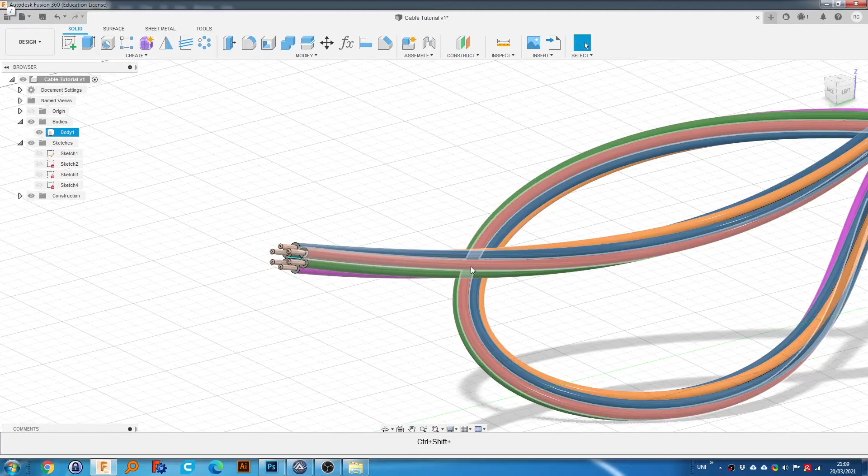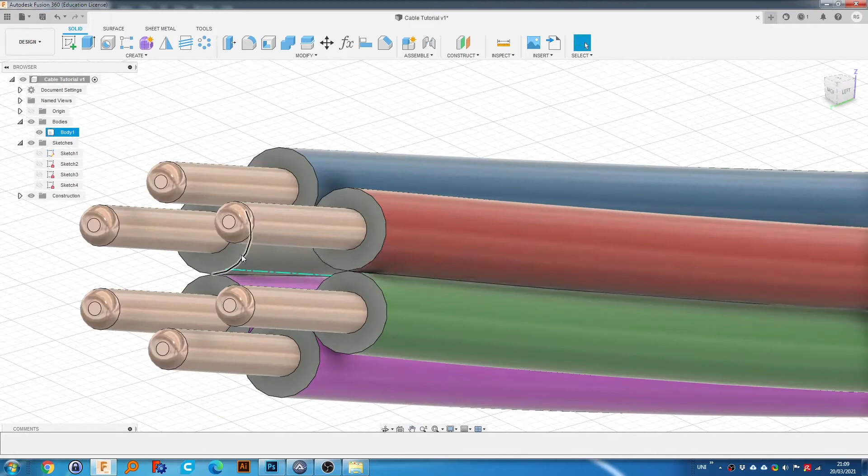This is a Fusion 360 tutorial on creating beautiful bundles of cables. So it's quite a simple concept, but it's very useful to know how to do this. So I will be teaching you how to make this load of mess.

At the bottom, you can see that I have a panel which I currently coded in AutoIt, so it should show the letters, the keys on my keyboard which I'm currently pressing. It's extremely buggy at the moment, so yeah, I have not finished this remotely, and it's kind of a code nightmare. Probably some mistakes in there, no doubt.

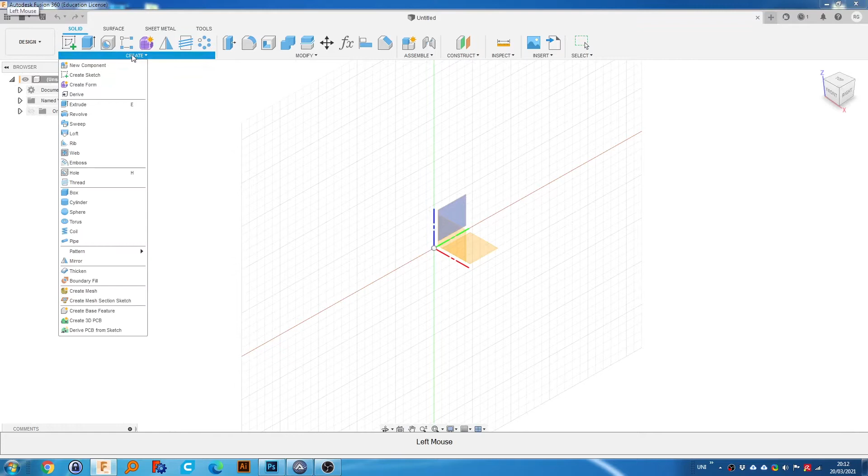Anyway, so hopefully that just gives you some sort of indication of any hotkeys I forget to mention that I use. So for example, I press L a lot of times to start a sketch, even though I am not necessarily using a line. Anyway, so let's get straight into the video.

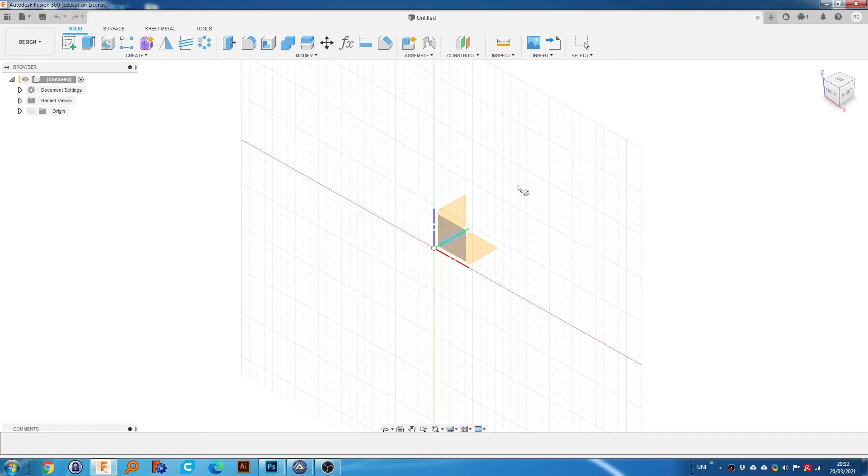So to create a cable, what we need to do is create a path essentially. So we're going to do it in the old-fashioned way, so in 2 dimensions. So I'm going to select one of these planes, so I'm going to select this one. Next, I'm going to select the spline tool, and I'm just going to draw some random shape, just for video

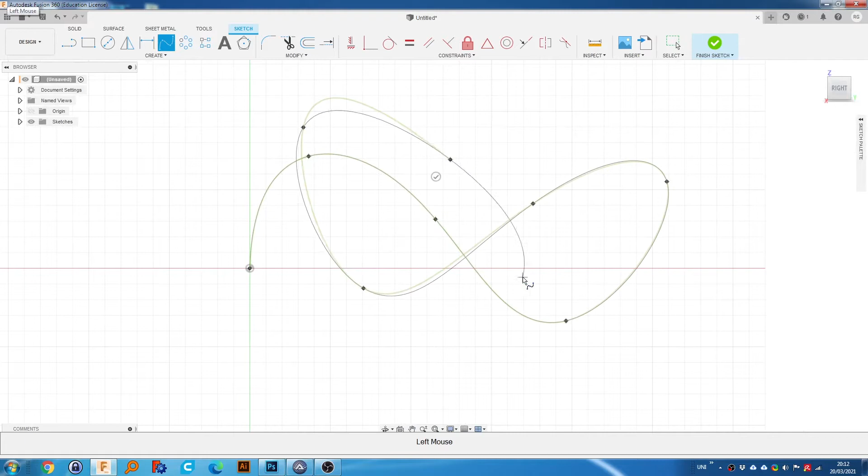sake. If this was for something like a device that you wanted to fit a cable, then you'd make something a little bit more thought out. Okay, so what I'm going to do here is making sure for this example, 3D Sketch is off, which it should be by default.

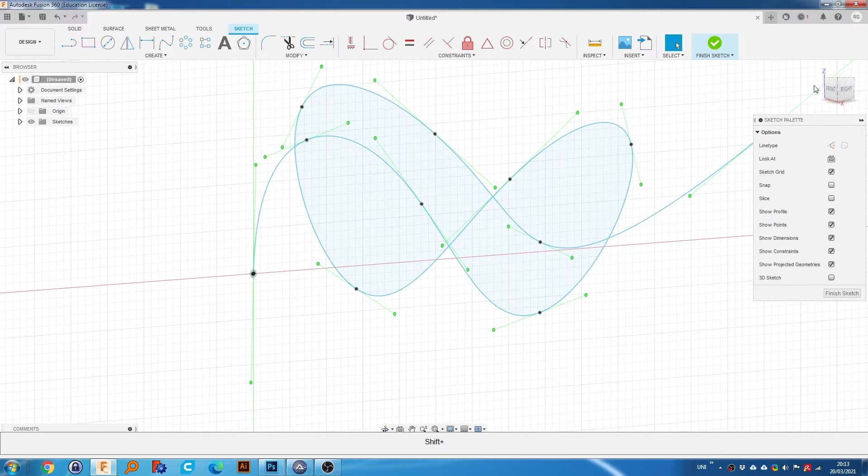What I'm going to do is work orthogonally, which means I'm going to work in discrete kind of angles, so front, right, and I'm not going to work in in-between angles like this, because it just will not be working out for you. You'll find that out if you ever try. Whenever you move a point, it won't be remotely what you thought it was. So if you work orthogonally, this essentially avoids it. So for now, I'm going to select the front face.

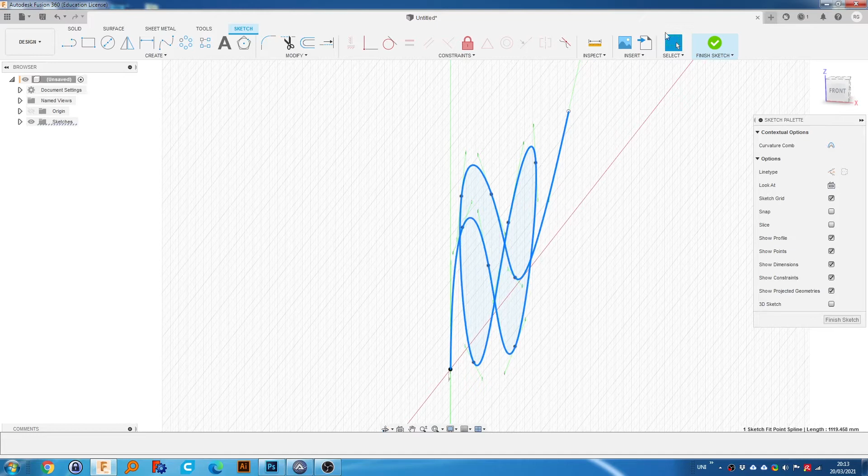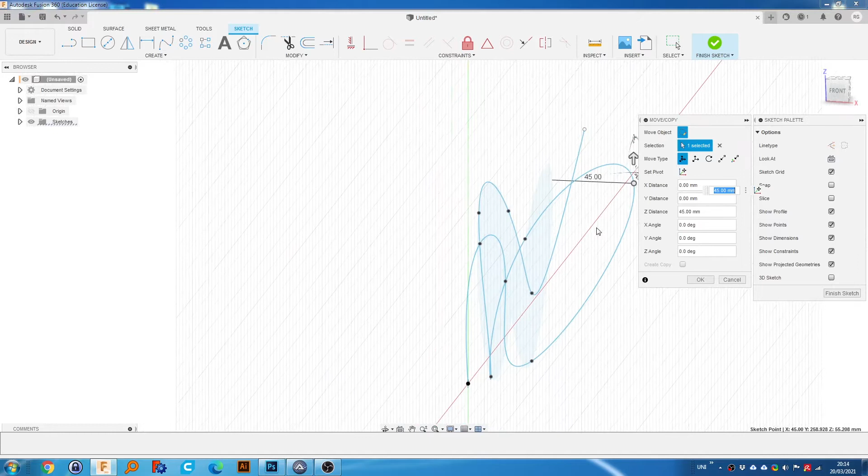Now this can be a little difficult as well, so I'm kind of gonna have to be a bit of a liar and go a bit halfway. So essentially what I'm going to do is select the selection tool, and we're going to hit M for move. First select one of the points, so we're going to say this one here. Select M, select the point, and now we're just going to give this some random translation. So this will bring it out of its 2-dimensional state into 3D.

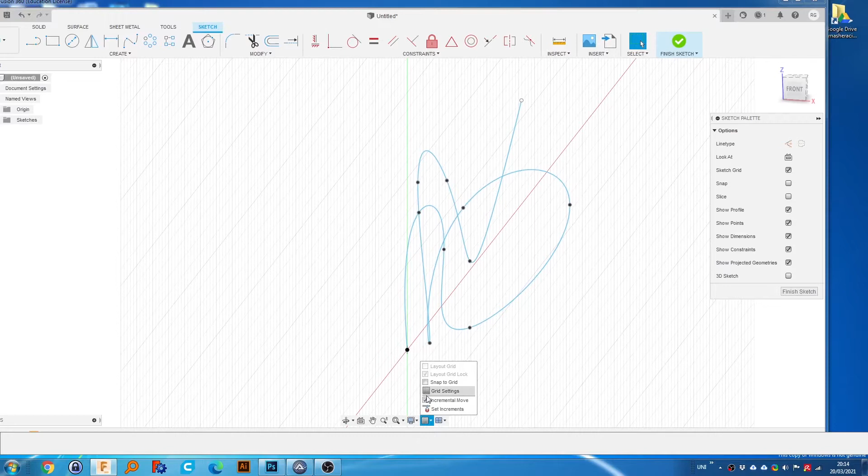We're going to do the same thing here. And I think I have a setting turned off, which is being blocked by that. I need to select it back on. Incremental snap. I think that's the one I wanted. So we want to move another point, select M. Just mess around with it. Go back orthogonally. Now we can sort of do the rest orthogonally.

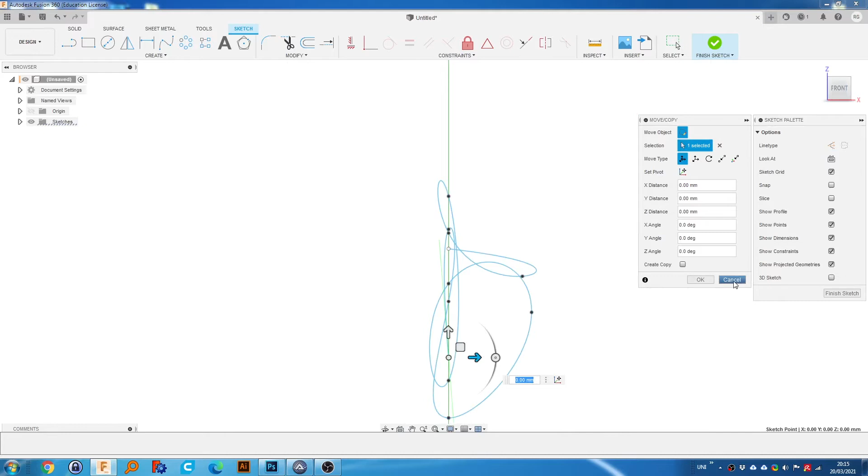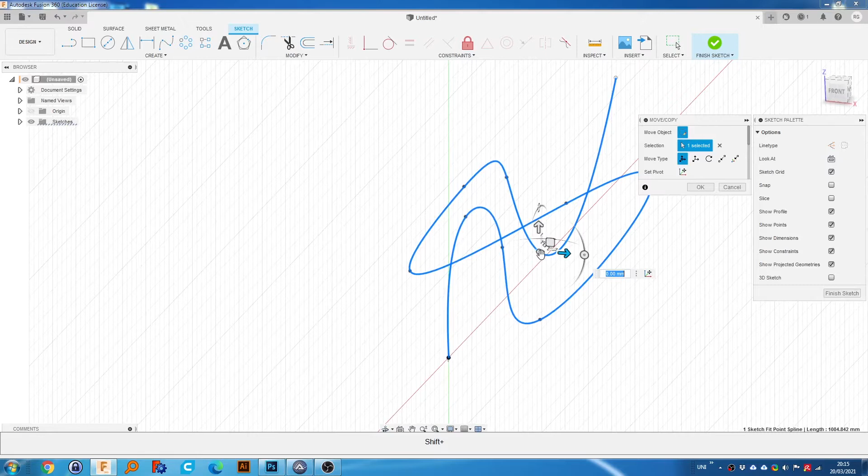So I'm starting one that's got a constraint. Let's try this one here. And move this up. Let's move this here about. This one, there we go. So we can move maybe this one as well,

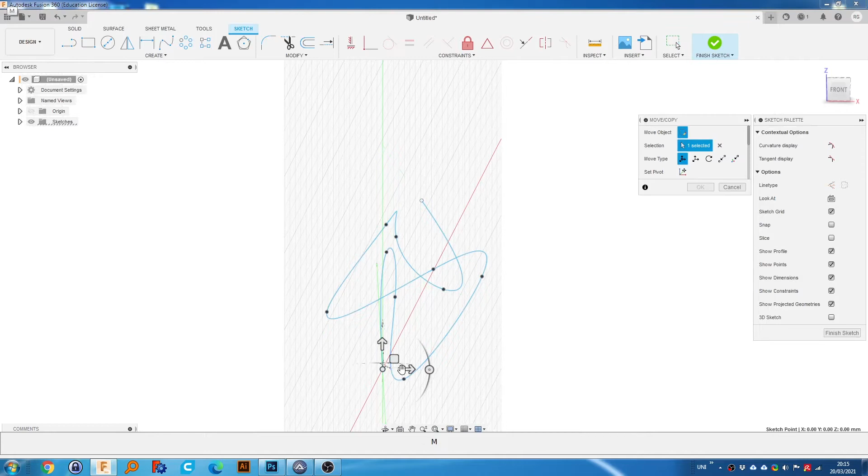which is actually constrained, I believe. Yeah, you can see this one is constrained by the origin using this coincident constraint. So what you can do to avoid that is you can select it and hit delete.

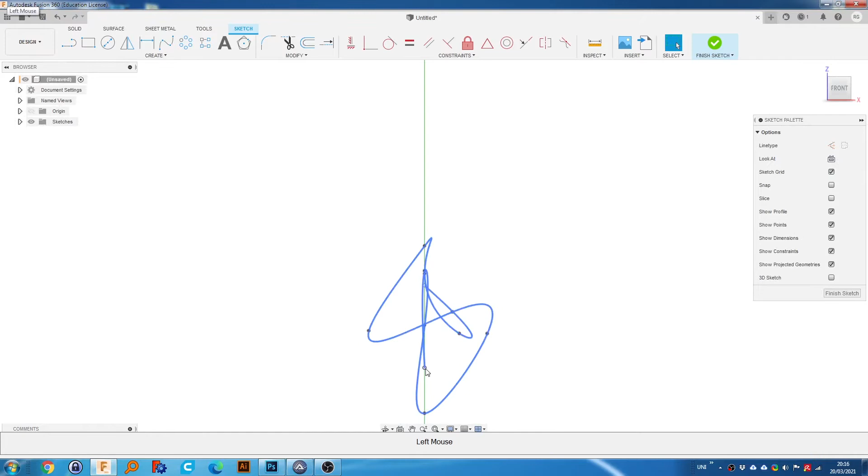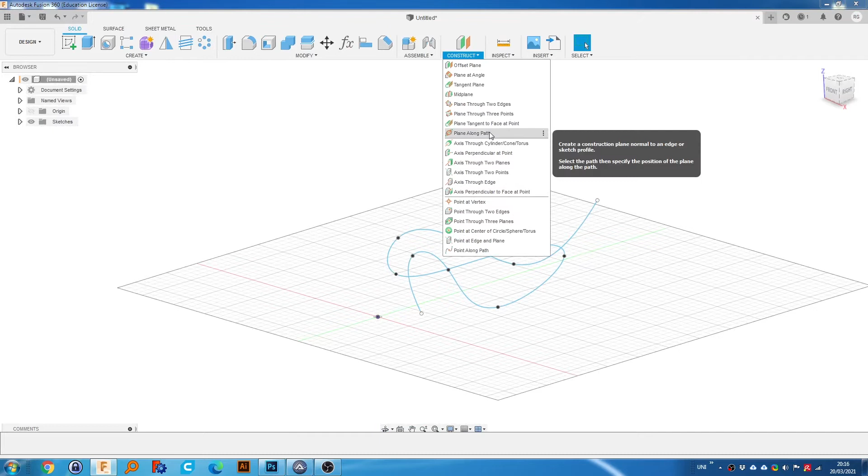Now, if we go back to the front view, we can make sure we actually have the point, not the path, because it's very difficult. Press M and we should be able to move it wherever we like. So that looks okay for now. This is only a rough example. So now what we want to do is finish the sketch and go to construction and create a plane along a path. This is the path. We're going to set this to 0.

And we're going to hit L, or you could create sketch. I'm going to hit L because it's just what I do. And I'm going to select this work plane. So now we're going to create our cable.

So let's say I want a 2 mil. Let's draw, if we hit X, or we can click construction. If you draw just a little line, this will help us out. We can create our cable. So let's turn off construction by hitting X.

Let's make a 3 mil cable. My Fusion has a problem because I'm using Windows 7, so we're going to have to type it again.

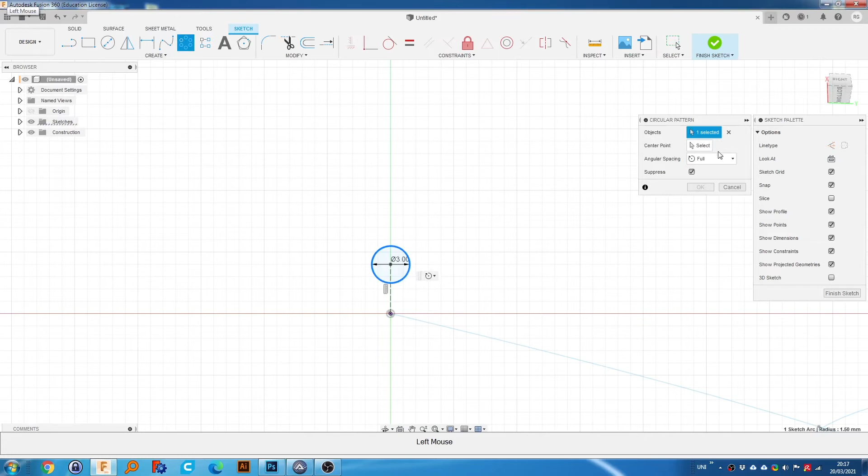Now what we can do is go to circular pattern. Now let's create a pattern and make the center point the origin.

And something like 6 cables. Now what we can do is use the tangent constraint and set that like that.

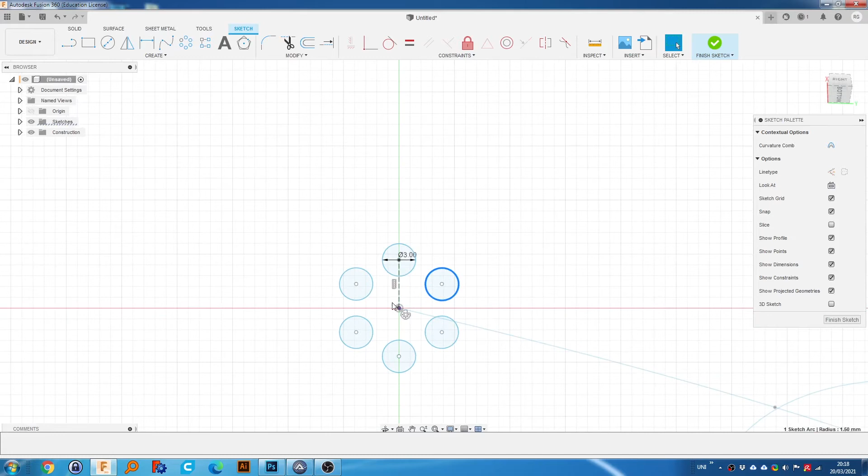As you can see, the borders of the shape went from blue, which means it's not fully defined, which is not something we should keep like that. Blue means we're missing dimensions which constrain it. So if I put back the tangent constraint, this means it's fully defined because it's black and we cannot move it.

After that, what we're going to do is go to create and sweep. Now I'm going to select the path for each of these, holding shift. Something happened here. Let's press X on the path, and for the path we're going to select our blue line.

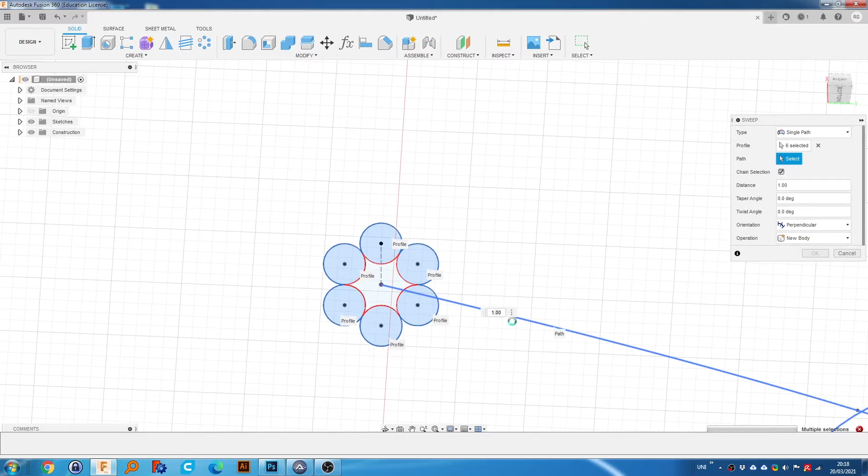Might take a second because it's quite a few profiles here. Fusion likes to do this nice black bar thing, which is always doing it for some reason. But don't click. Okay, so we have our cables.

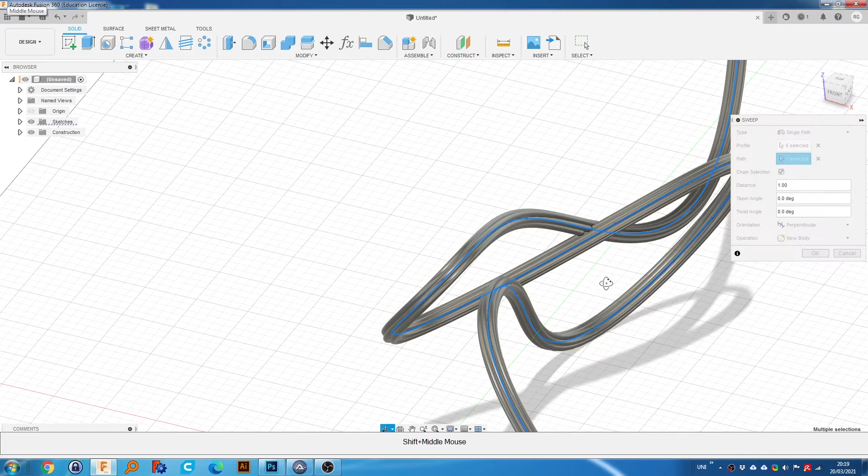Now, cables in real life tend to be, as you can see here, we have a line we should have moved, but we can do something about that afterwards. Essentially this is intersecting, but we can fix that afterwards.

Anyway, what I was saying about the twist angle. So cables tend to be a bit twisted in real life. So for a single twist, we can put 360. We get a single twist, which will take...

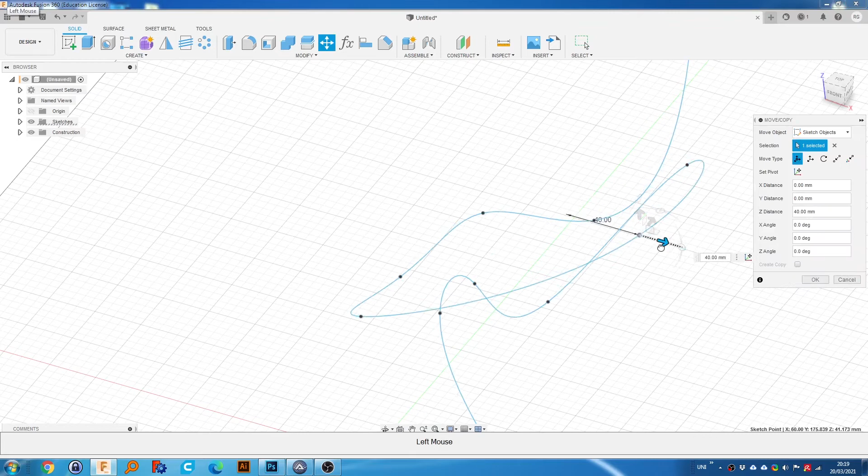Yeah, so the thing that I mentioned before has actually become a problem. So what I'm going to do... There we go. That shouldn't be a problem no more.

If we go back to sweep, select our profiles. You don't need to select control or shift or whatever. Now select the path. Select our path.

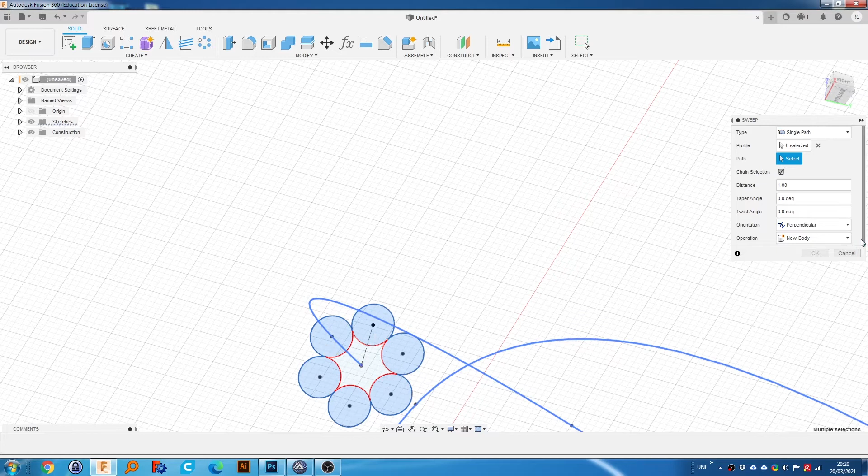Also, it might be worth noting, if the angle is too steep, you'll very likely get this intersection error, as you saw me just get. If that ever happens, you should try and soften any extreme angles that you may have, such like this quite drastic angle. If that happens, you're going to have to soften it by moving it about. It's something that comes with experience.

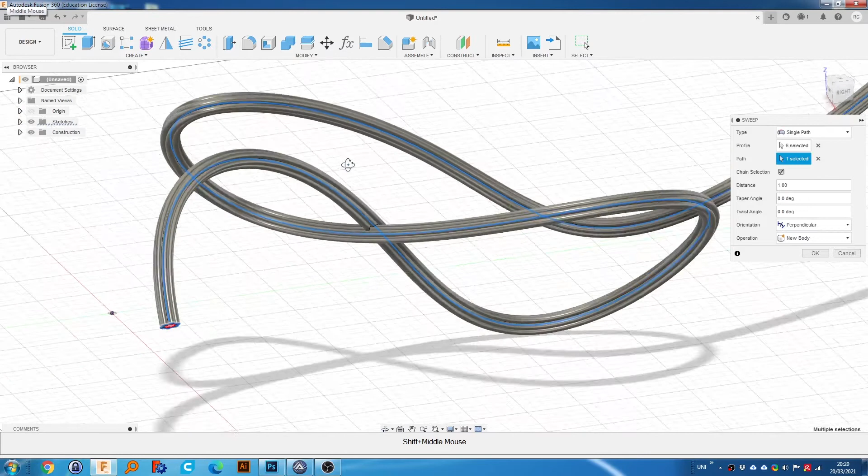So I'm going to click OK for now. Okay, so we need to fix that. Sorry, this thing's in the way so I can't see it. I'm going to have to rethink that out for next time. I'm going to make it a little bit smaller so that I can get past that.

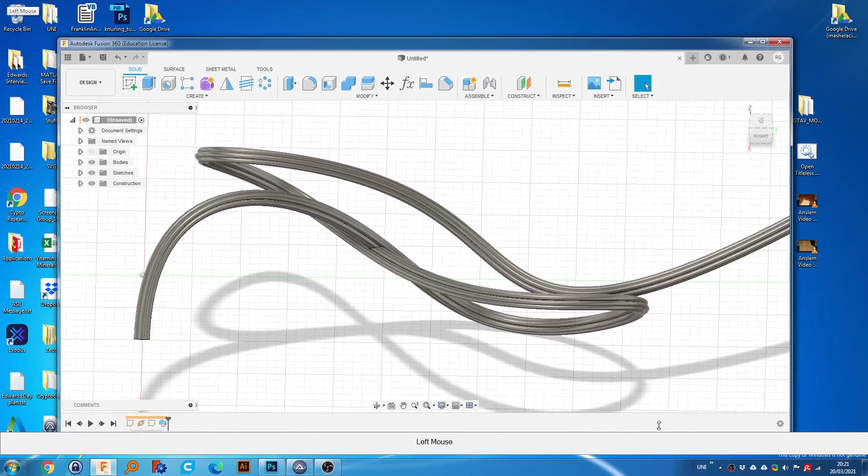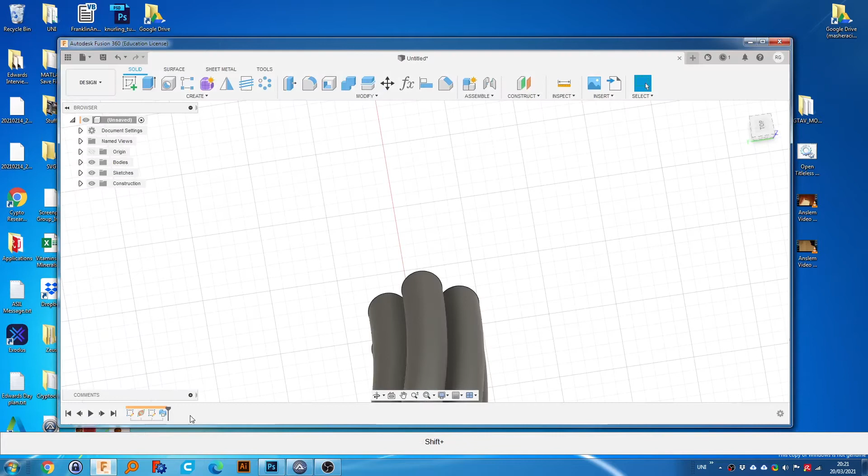So we need to go back to this, and... wrong one. It's actually the first sketch here. I made a mistake.

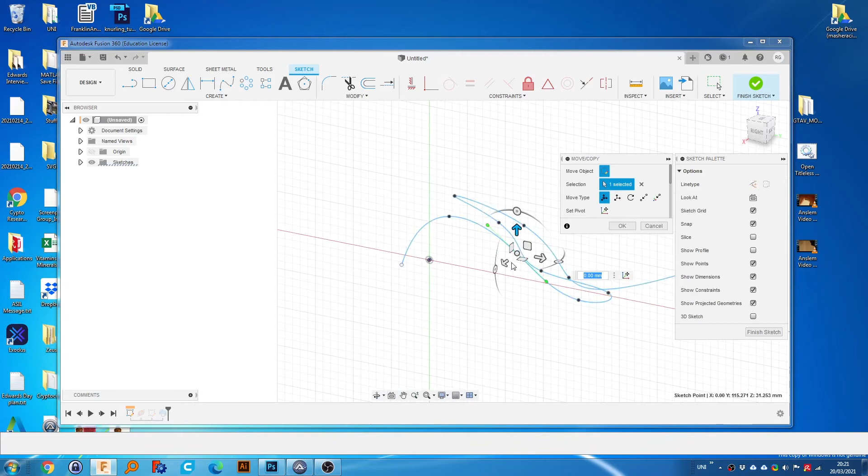So as you can see, the problem is in the middle, we cross essentially too close to the other spline path. So you can see this is quite an extreme angle up here, so I'm going to just soften that by doing something like that.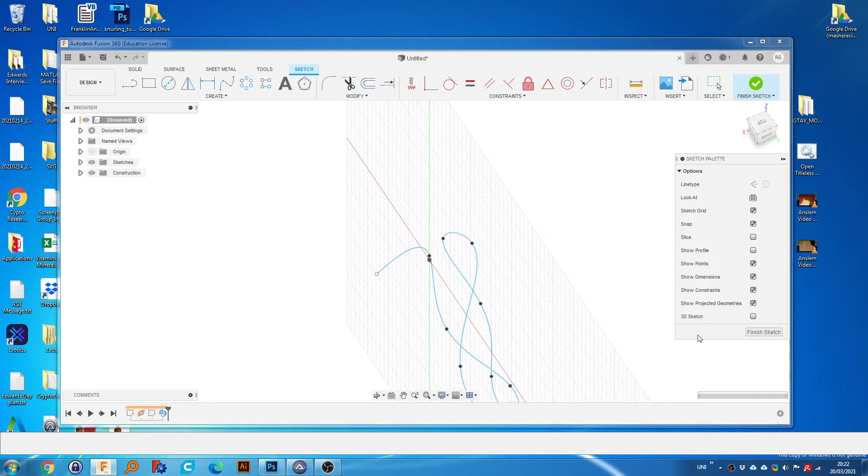That should be okay. We're going to click Finish Sketch. This is the beauty of being in a parametric workspace. We can go back in time and make any adjustments, and Fusion 360 will essentially update to our new settings. You can see I've got the same sort of problem here.

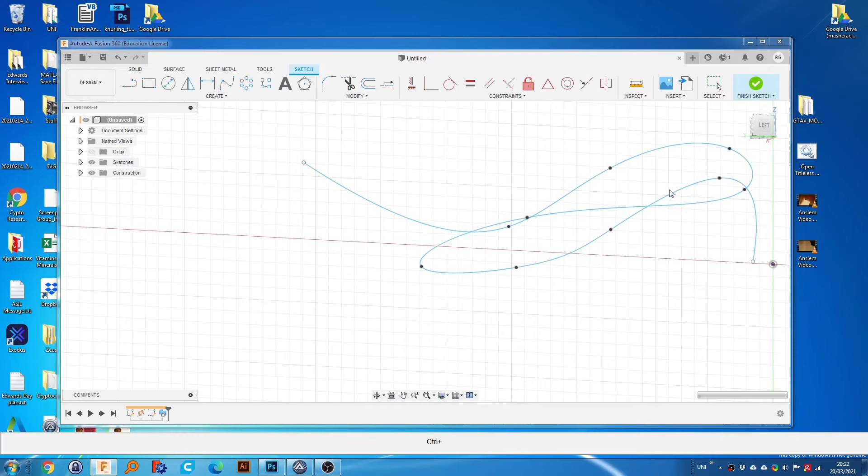I'm just gonna press M. We're gonna move this down a bit. Click Finish Sketch. So you can see we finally got one that doesn't intersect finally.

So as I was saying about the twist angle, we can go back into sweep. And Fusion's going to do its little dance again.

So now in the twist angle we can put 360, which means one twist throughout the entire path length. This always takes a long time to do, so you just have to be patient.

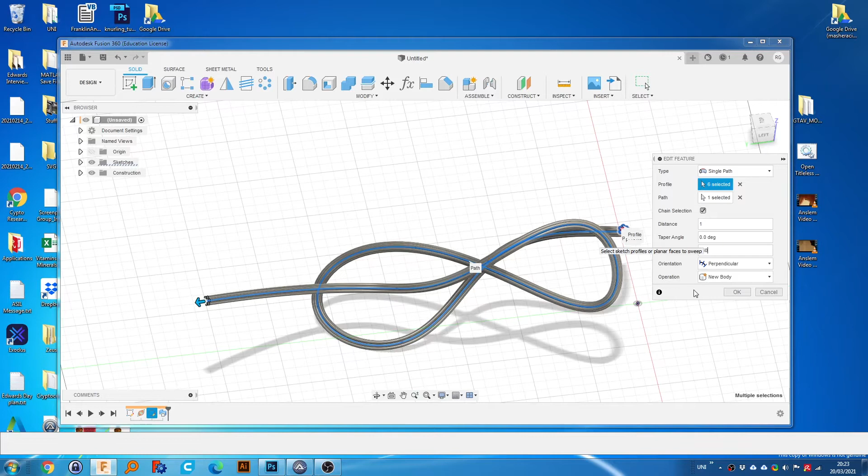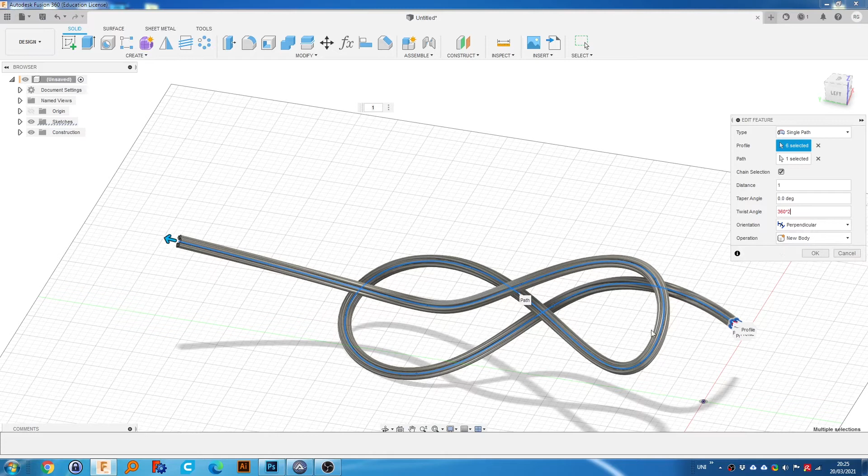As you can see, we have a single twist down the entire length, which is almost a bit too difficult to see. So what we can do in this text box is actually do multiplication. Using the asterisk sign, we can times that twist by 2. And then Fusion will go off and make a really slow render.

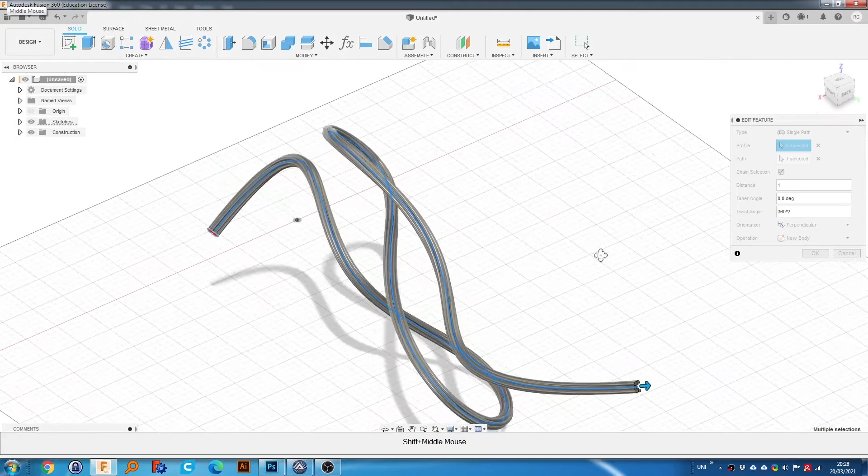There we go, Fusion's going to take about an hour to do it. It's going to crash as well almost. As you can see, after two twists, we have 2 twists somewhere in there. So we can click OK.

Once it loads again, possibly because I have Photoshop in the background, it's going to load again. So yes, I'm going to wait for that. So you can see now it's loaded.

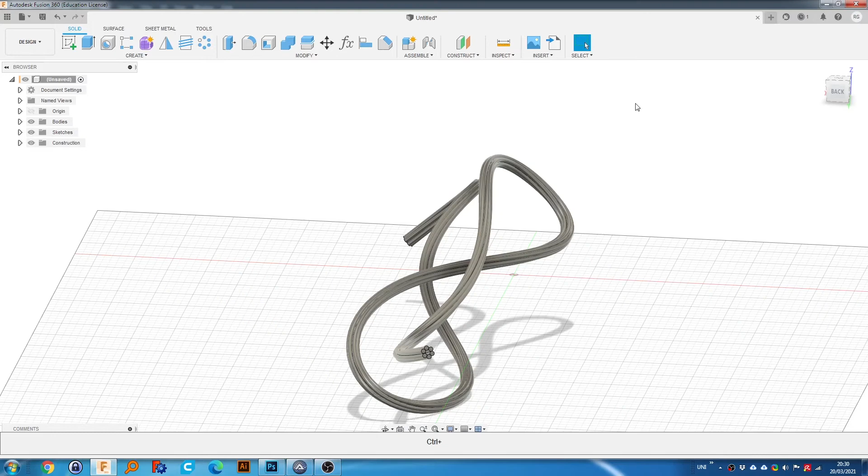What we can do is either add the conductor of this cable, or my favorite part, coloring the cable. So we can hit the key on the keyboard, A, for appearance. I'm going to look for different typical color cables.

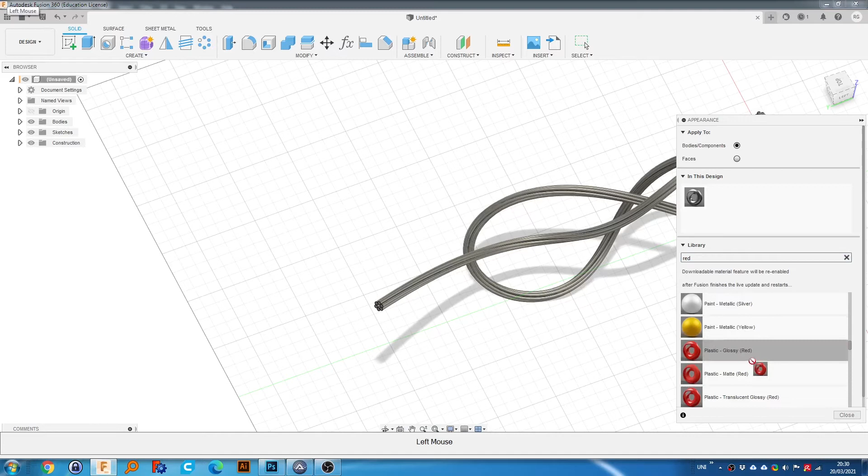I'm going to start off with red, a glossy red. And what we're going to do is, because it's in one body - which we might have done differently where we're all separate bodies, but I chose to do it as one body - I'm going to select faces. So now I can apply to individual faces like this.

So let's say we want a blue. Let's type in blue. If it doesn't exist, we can create our own from one of these presets, but at the moment they do exist in what we want. Let's try green, green plastic.

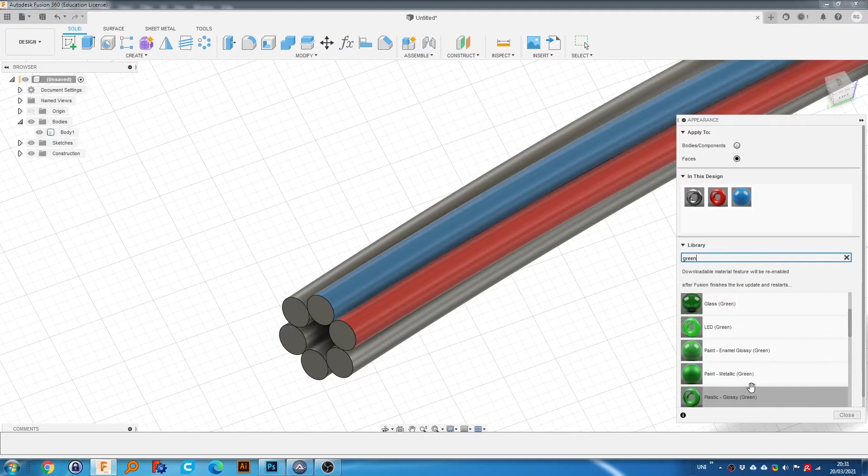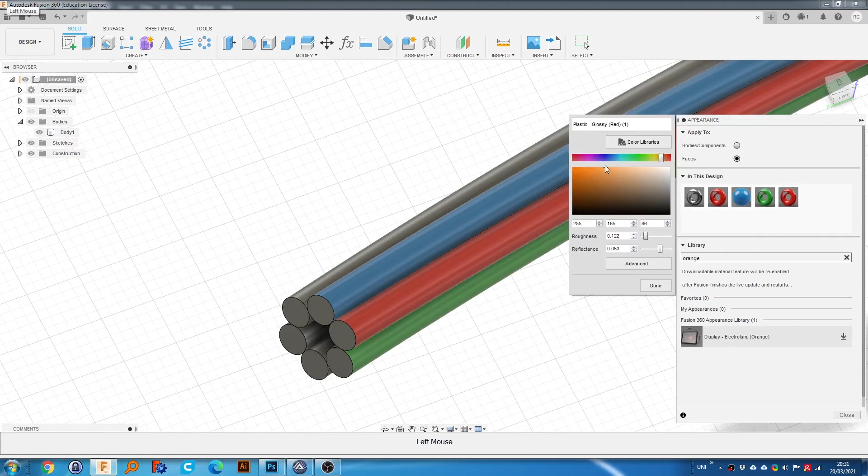Let's try, I don't know, orange. Okay, orange doesn't exist, so what we can do is duplicate that one. We can edit this and make orange ourselves. So we should have a kind of pale orange there, but we can add our orange there.

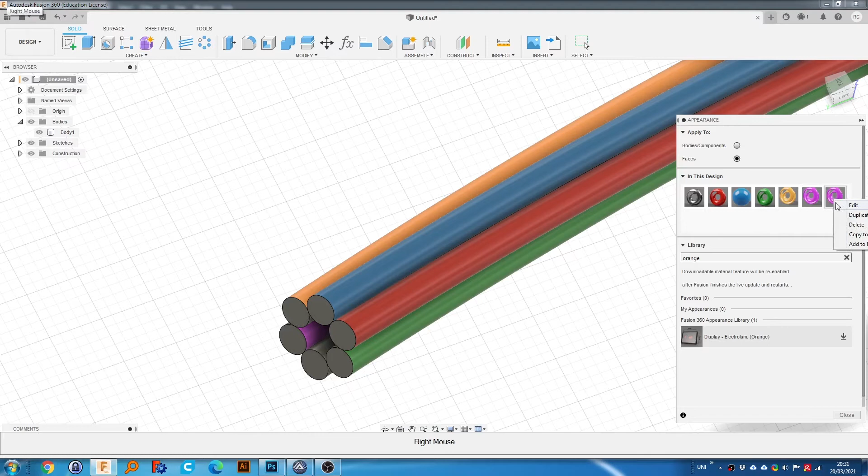We can do the same thing again. Let's make a purple - it's a bit of a strange color for a cable, but there's a purple. Let's do it one more time, and let's create a nice cyan. It's pretty ugly, but let's put it on there.

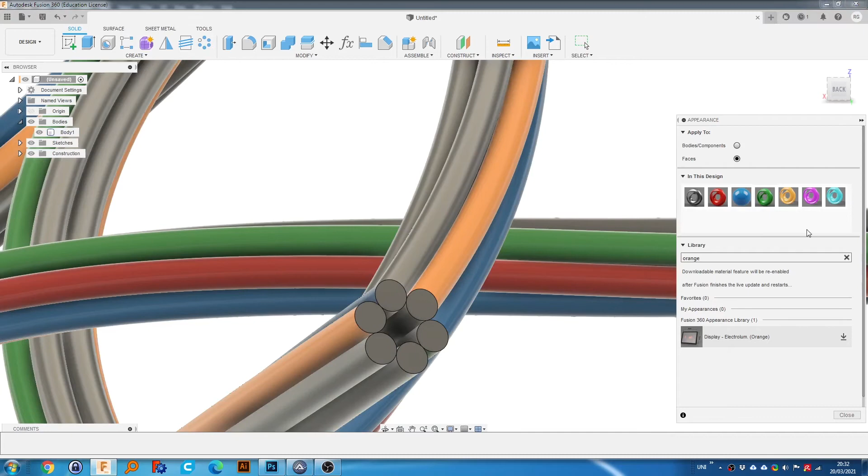So we got - oh, I think we're missing a couple more. Okay, I'm going to be lazy and let's reuse the green, which doesn't appear to have worked. Let's try reusing the blue. Yeah, that works. Let's reuse the purple. Pretty lazy, anyway, so let's say we are happy with that.

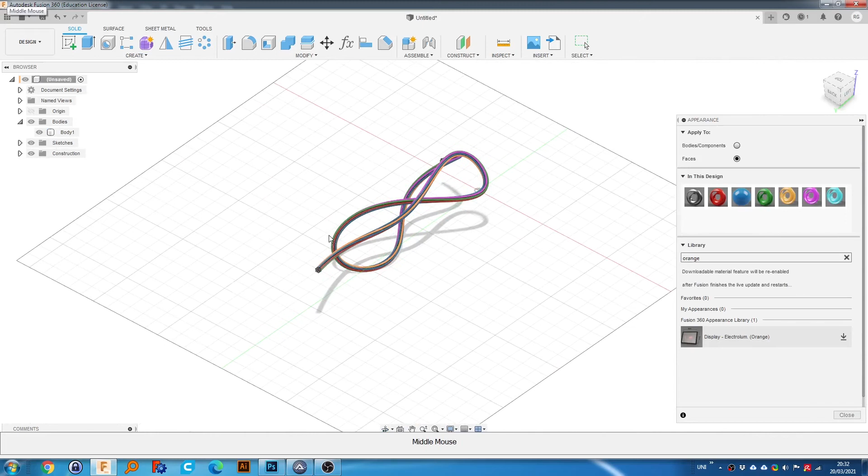We can actually do a render afterwards, but before that, I do want to make a conductor as well. So what I'm going to do is hit C or L, one of those shortcut keys for creating a circle or sketch. I use C or L a lot of the time.

And I'm going to select one of these faces. The beauty is we only need to do it once, and then we can create a circular pattern. Let's make the circle here - means it's the center of the circle. We can create, let's say we're going to make it 1.5 mil. This is a pretty typical conductor size in real life.

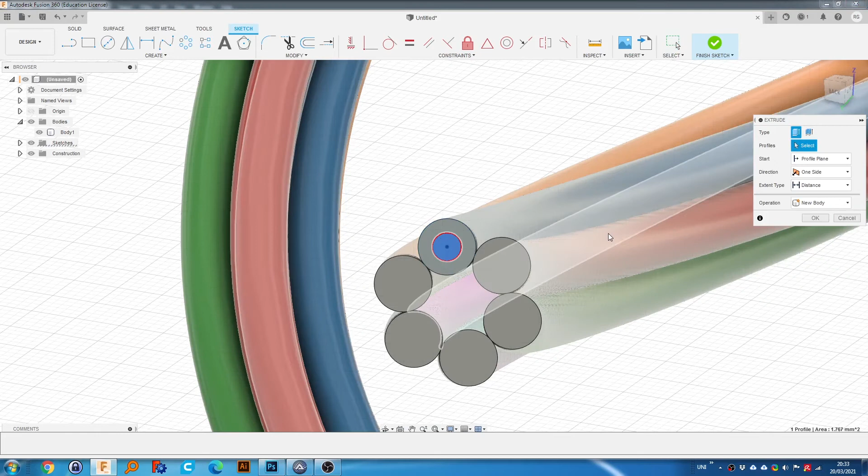And let's say we're going to extrude it by about 20 mil. I already have my unit set up as millimeter, as you might have noticed. Let's zoom back in - okay, that's a little bit too long. Let's try 10, which is fine.

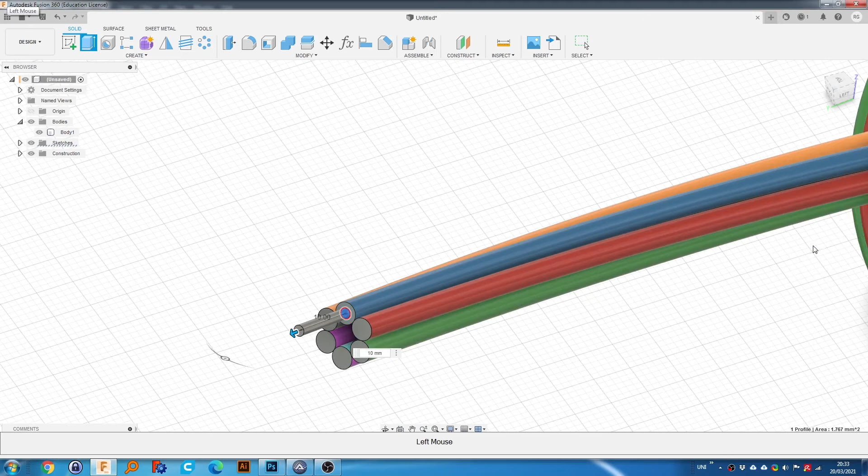We can select join, which will make it all part of the cable, which is what we want. You can see it is one because it's stated as just that one body. But now what we can do is color it beforehand if we want.

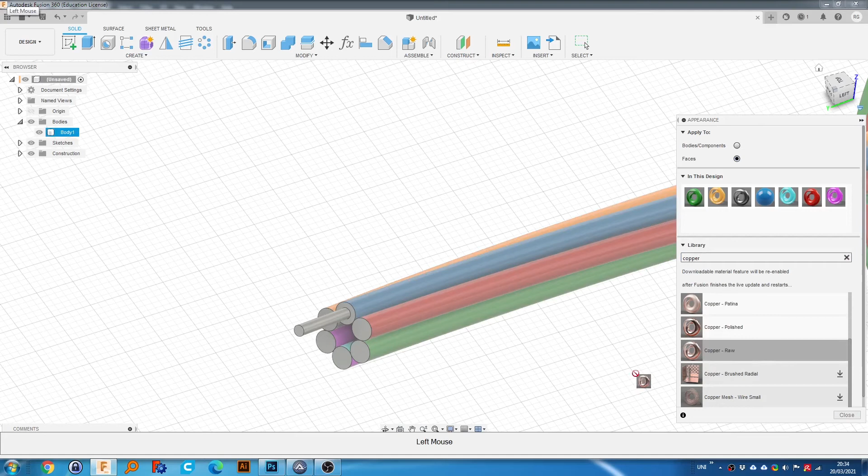Let's go down to copper. I'm going to say polished copper. And again, we need to select faces. I'm going to select polished copper and select it on there. We're going to do the same thing here.

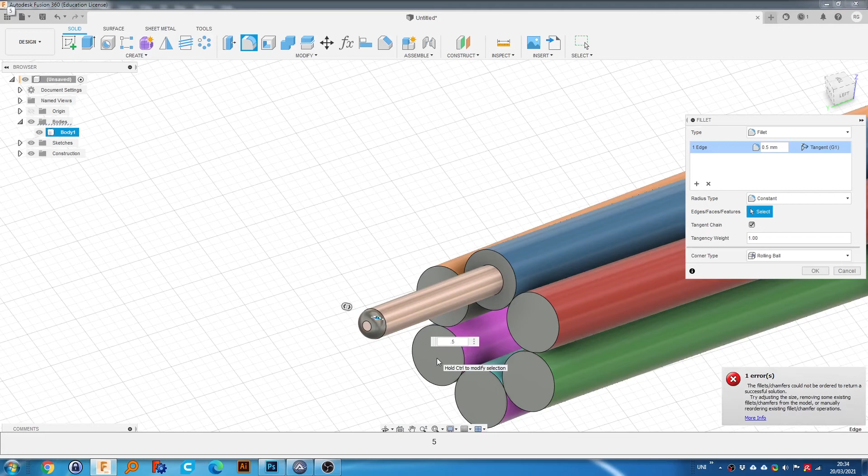We can even press F to fillet this surface here, just a little bit, but this is not really necessary. 0.5 should be enough, but because it's a different face, we need to press A again, and we need to drag that polished copper onto this face as well.

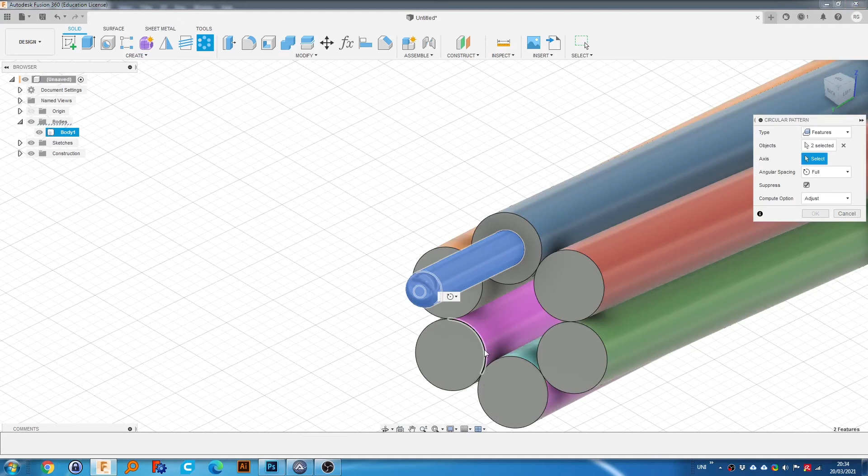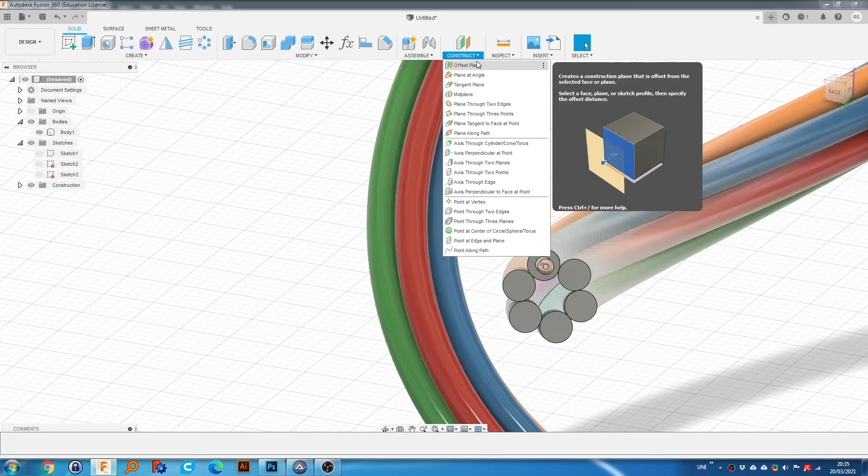Okay, so now what we can do is go to circular pattern, and we're going to select this feature and this feature. And the axis is going to be, well, it's not going to be that, but what it's going to be is - if we go back to our sketches from before, what we can do is turn on back the old sketch, and it keeps going off.

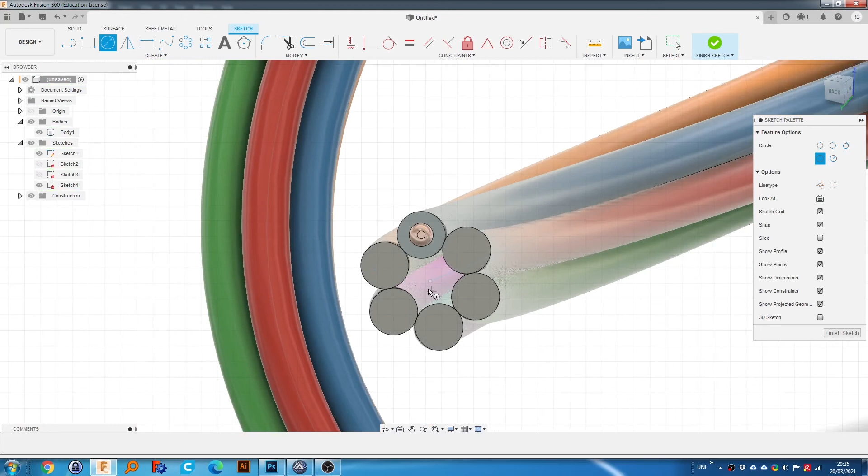Okay, sorry about that, I had to pause to work it out, because normally we have a circle to create a pattern around, but in this case we don't. So what I did to overcome that is create a sort of an axis manually.

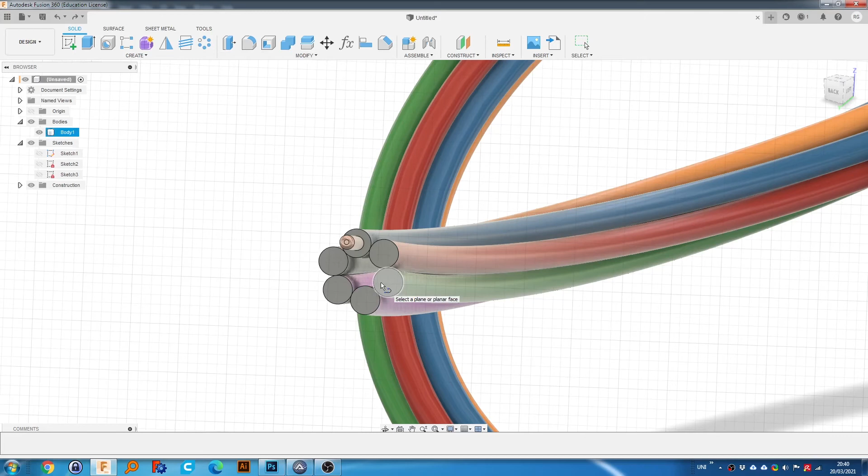What I did is select one of these faces and project this face, the opposite, and just like that. That should be enough. So now we can draw a line from here to here. Press escape and draw a line from here to here.

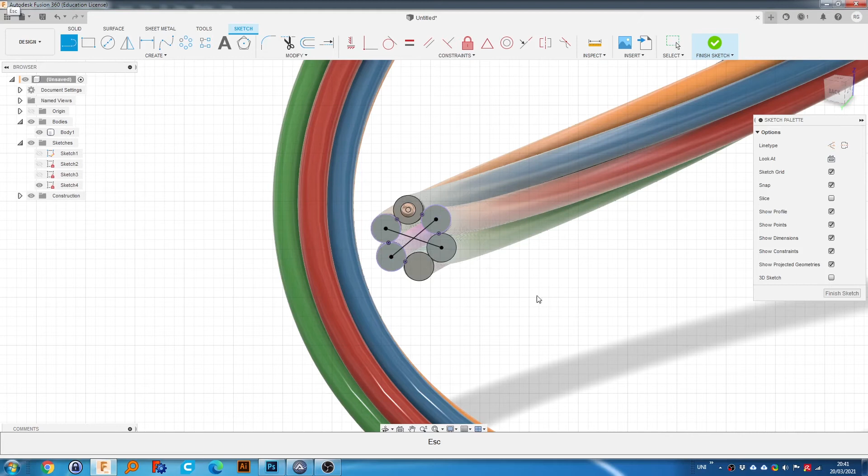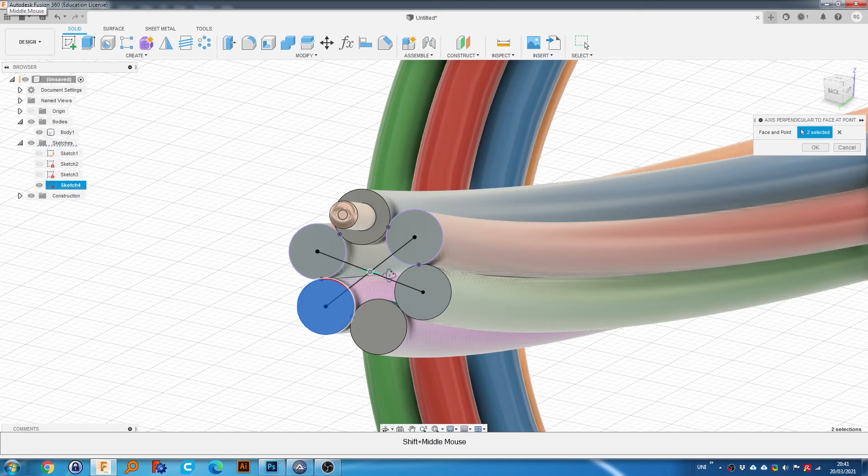Now we can go to create point, and select a point in the middle there. With that point we can go to construct and select create axis perpendicular to face at point. We can select any one of these faces, and select this point. You can see we've created an axis that we can use to create a pattern around.

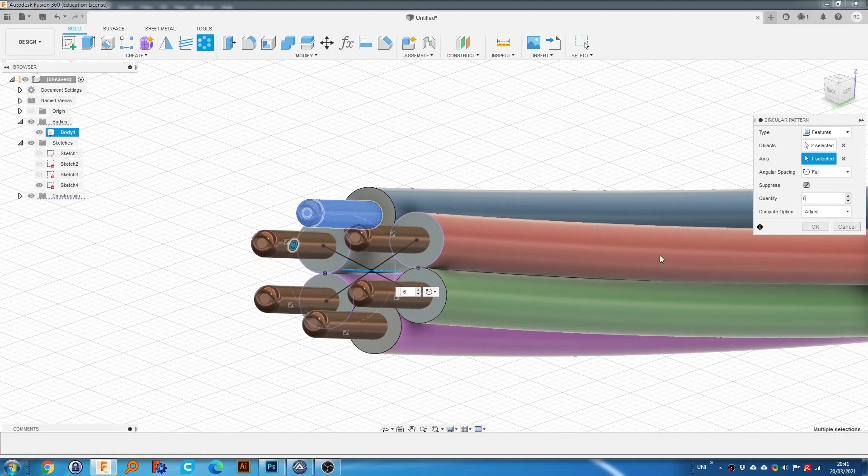So if you go to circular pattern, we can select the features we want to pattern, go to axis and select that axis. Now we change that to the same amount of faces, that was 6, and we can see we got a perfect pattern in the center of each face.

We can now zoom out. We can have a look at what this looks like in the render workspace. Normally it looks a lot better in the render workspace.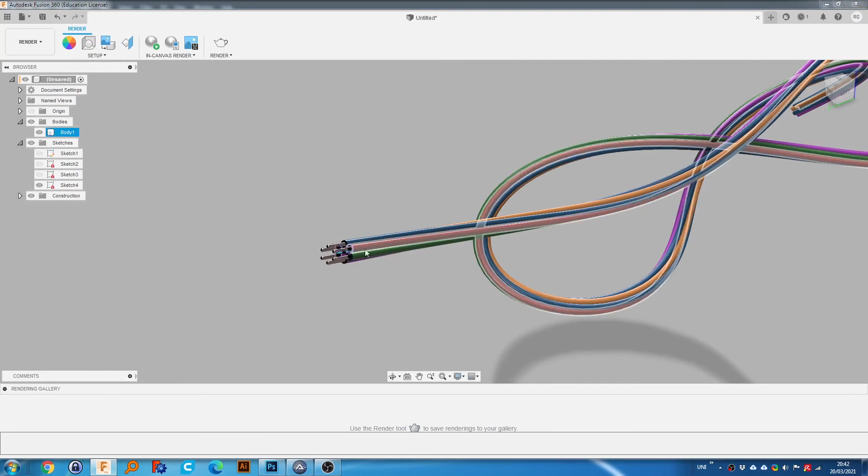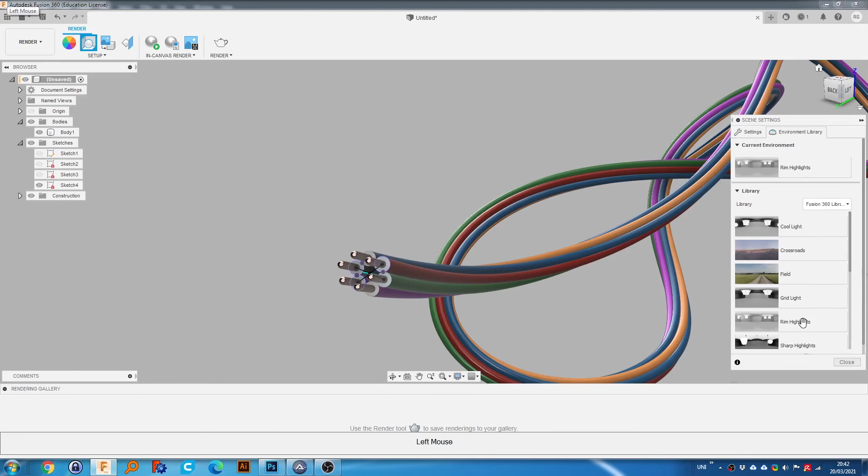Like that, we can go to render. We could set up the scene settings, but I don't think we need anything too crazy, probably just rim highlights. Double click that, it's already selected. We can select any of these if you like, maybe white.

You can zoom in as well if you want. It's really up to you.

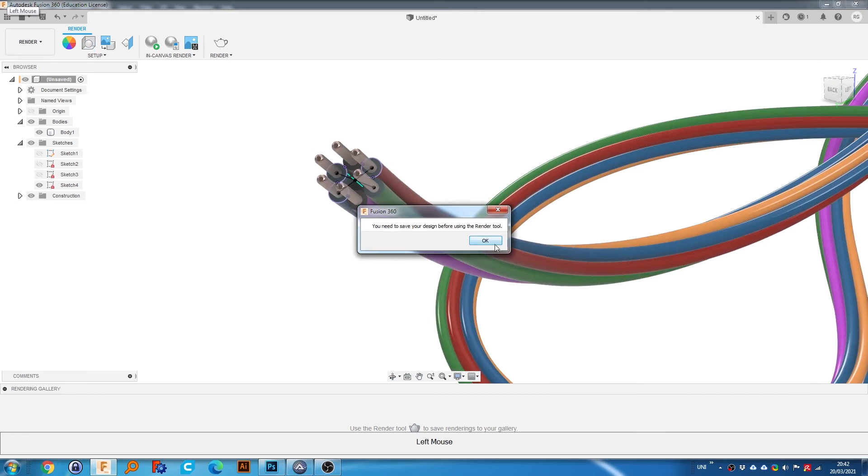Okay, so if we click render, we need to save this first. So cable tutorial, and we're going to click render. We just need to give it a moment for it to save.

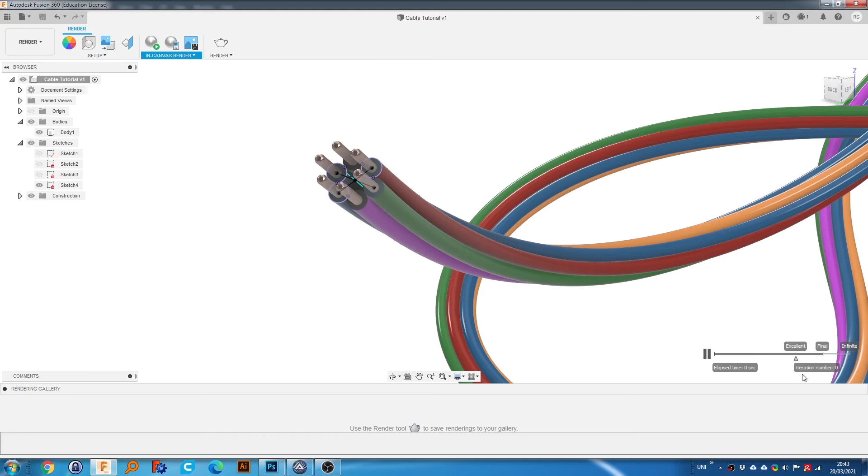Is it ready now? Okay, that's not the one we want. We could use that, that's up to you, but I like to use the in-canvas render, which is just a bit simpler. I can use this setting here. Just give this a moment, and Fusion will begin to essentially go through various passes to render this.

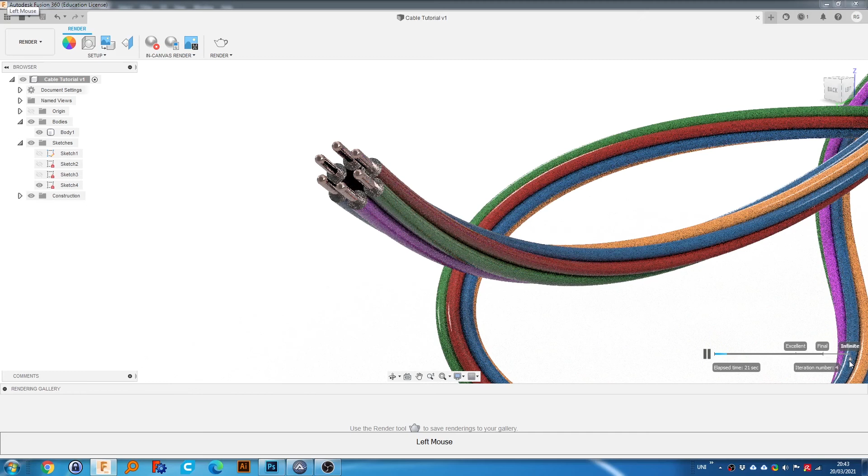Now you can control this slider here. The more you go towards infinite, the better the quality and the more passes it will do. I'm just going to go to excellent, that will be fine for this tutorial. I'll pause the video and resume when it's ready.

So you can see that Fusion has got to excellent, but it's still quite a bit grainy. So I will just put this up to final and pause it now to see how much better it gets. You can see Fusion has refined it a little bit more.

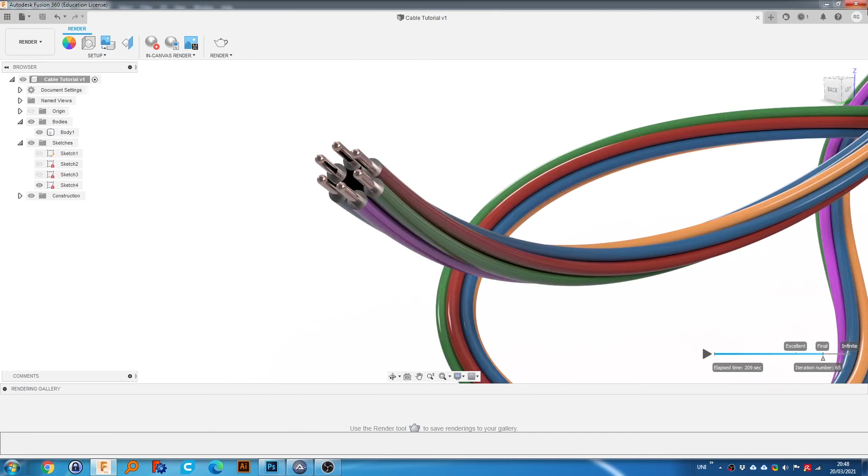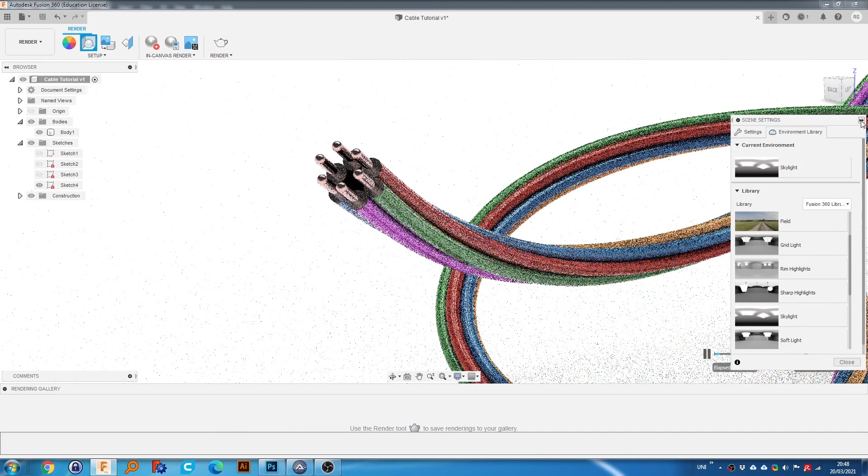Now what I'm going to do is go to scene settings and change the light, because it is pretty much a crap light right now. I'm going to go to something which is probably better, because that was a little dark. We can essentially change it with the settings here, the brightness or the exposure, but a lot of the time I'm a little lazy and I choose to go straight to a different lighting setup.

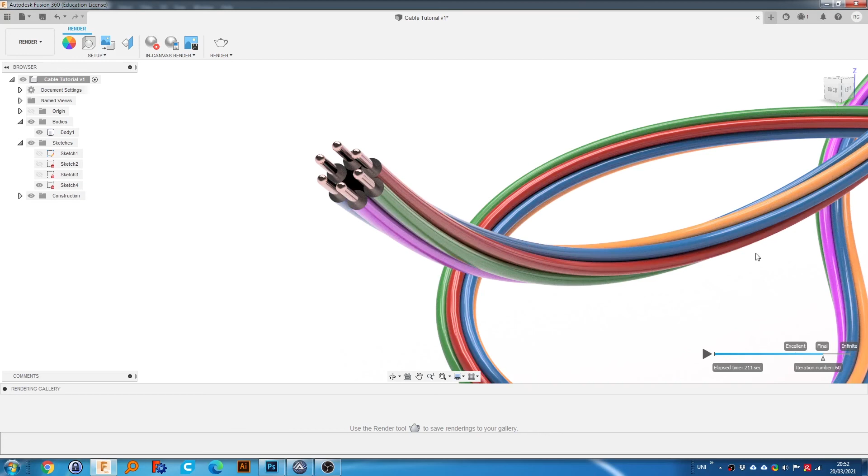As you can see, it's created some very nice glossy looking cables. So we can go back in design and turn off sketch 4. If we press control 4, we can see it without any lines. I'll go back to control 6 to turn them back on.

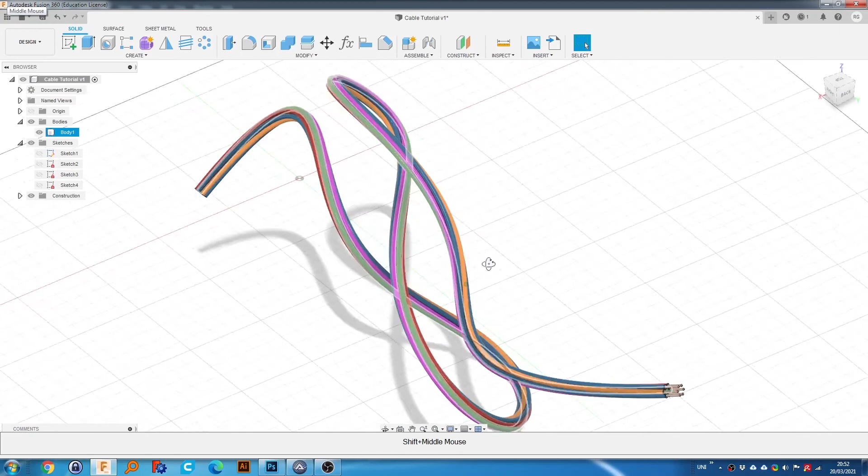So yeah, I hope that helped. You can use this sort of idea, which I will probably cover more later in different tutorials, but you can use this idea to connect cables in, say, if you had different electronic devices, you could create the cables to show off how they are connected. So yeah.